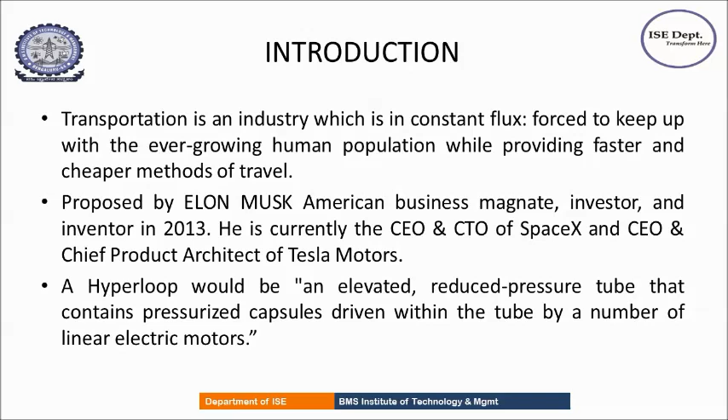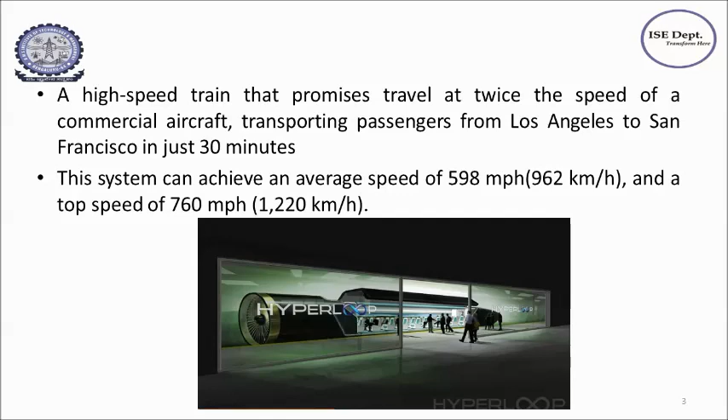Hyperloop propels a pod-like vehicle through a very low pressure or near vacuum tube at more than airline speed. It is both fast and inexpensive for people and goods. These are some of the illustrations of Hyperloop.

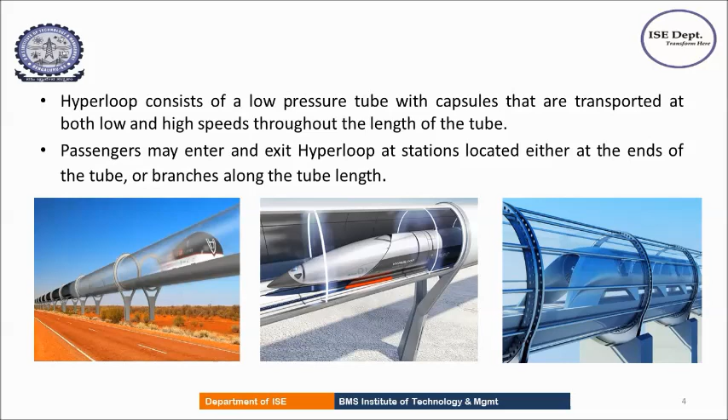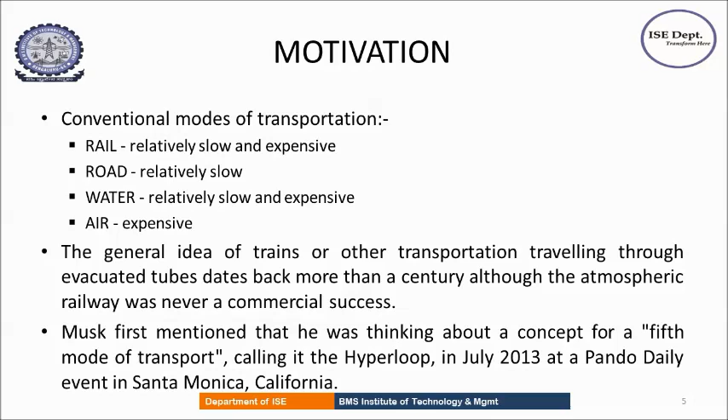So we have our conventional modes of transportation as railways, roadways, airways and waterways. These are either slow or expensive or a combination of both. In order to tackle this, we have the fifth mode of transportation, which is fast, efficient and inexpensive. The main objective of this is quick and safe transportation between cities.

This high-speed transit would have some of the characteristics such as immunity to weather, collision-free, twice the speed of a plane, low power consumption and energy storage for 24-hour operations. The name Hyperloop was chosen because it would go in a loop.

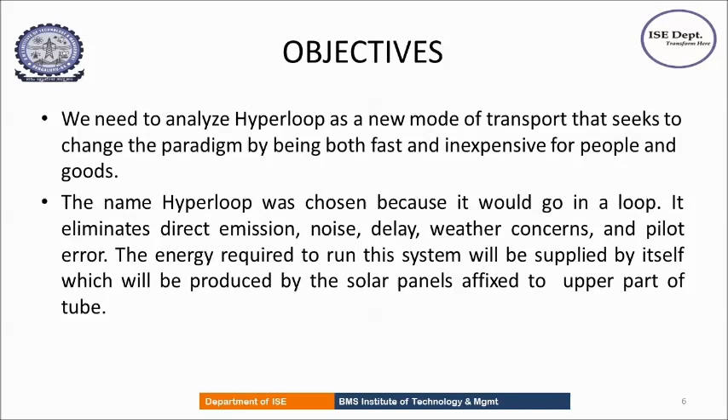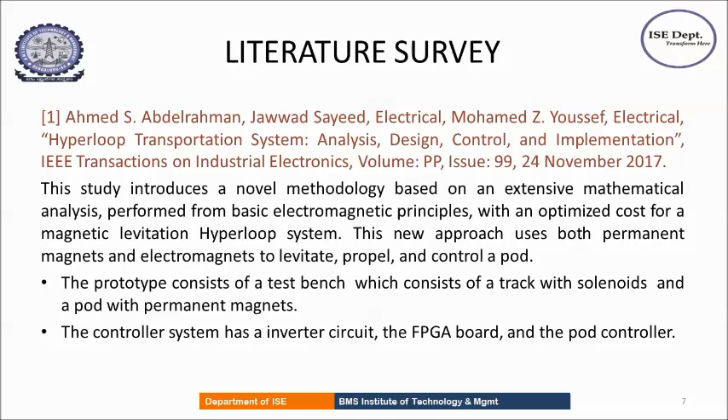Let us see some of the papers which give us some more details about the Hyperloop. So in this, they have developed a prototype of the working of the Hyperloop. The test bench will consist of the track with solenoids and a pod with permanent magnets. They also have a control system which is used to control the whole system. So this is the 3D printed pod and the track implementation. The inverter simulation and solenoid simulation were performed and the coils produced the force that was expected.

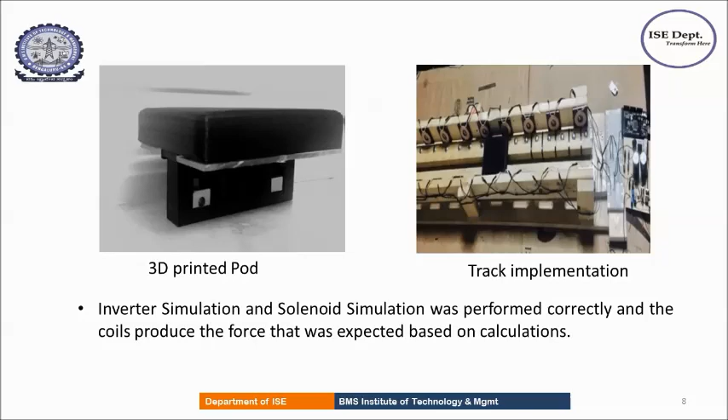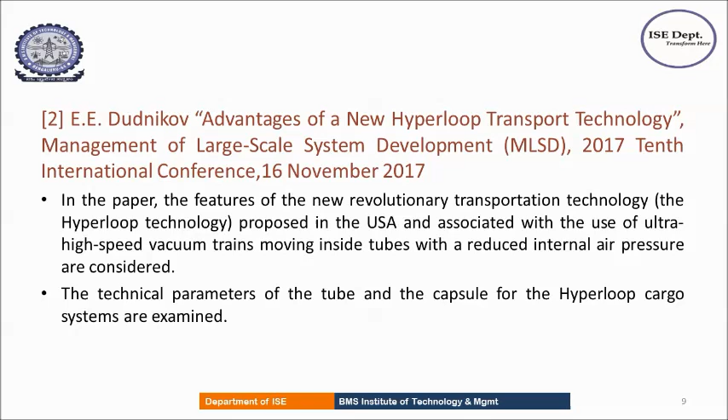In this paper, they mainly focus on the advantages and disadvantages of the Hyperloop transportation system. The technical parameters of the tube and the capsules were also examined. So let's see the design part of the Hyperloop. We need the Hyperloop to be very energy efficient. So technically we have four major components: capsule, tube, propulsion and route.

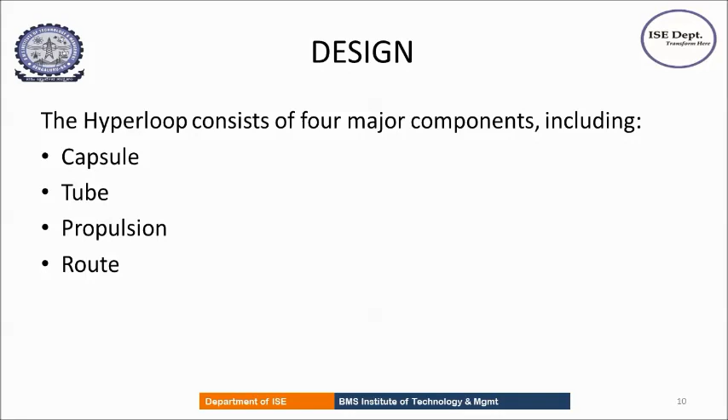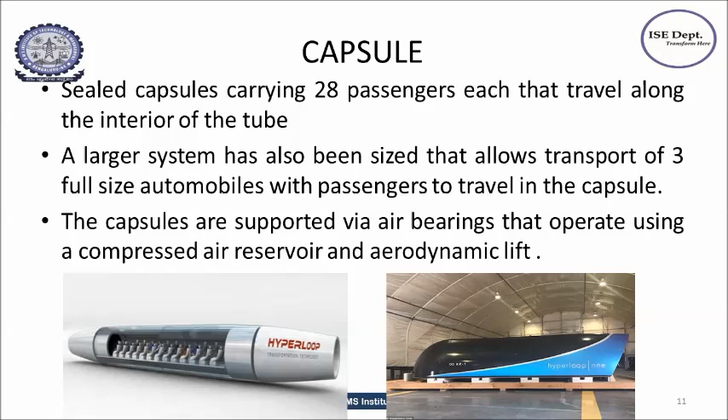We have the capsules that carry passengers traveling at speeds over 700 miles per hour. As we can see, this is the illustration of a capsule. The capsules are supported via air bearings that operate using a compressed air reservoir and aerodynamic lift. The tubes are not completely free of air, but they have very low pressure. The compressor fan inside the capsule will compress the air and redirect the air to the back of the capsule for additional propulsion.

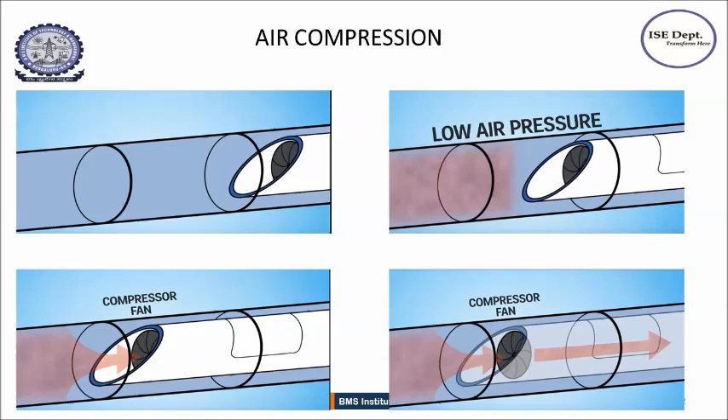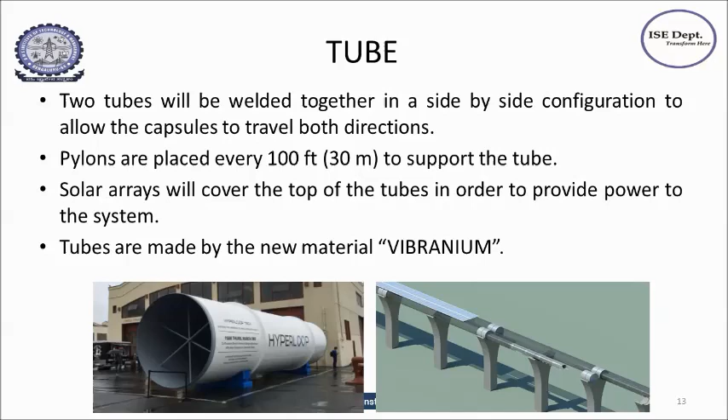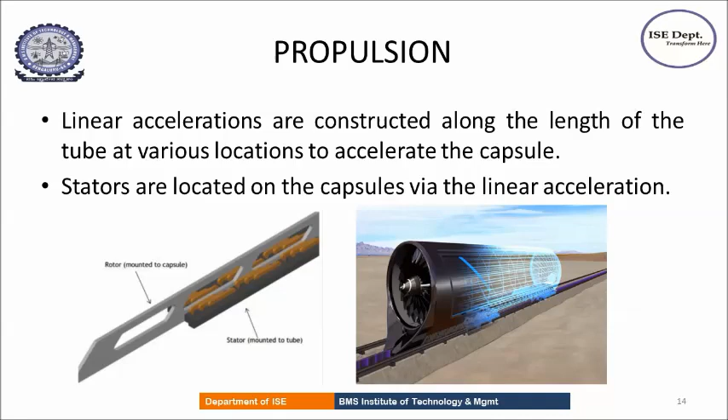The capsules are propelled by the electromagnetic motor. The tubes will have solar panels which are used for generating the required power. The tubes are made of a new material called vibranium. It is both stronger than steel and lighter than aluminium. For the propulsion purpose, we have the stator which is stationary and the rotor which is the moving part. These two help in the linear acceleration of the pods.

The main route has been proposed between Los Angeles and San Francisco, as you can see in the left side diagram, and the right side diagram shows the route between Pune and Mumbai which has been proposed. This reduces the travel time from 180 minutes to 25 minutes.

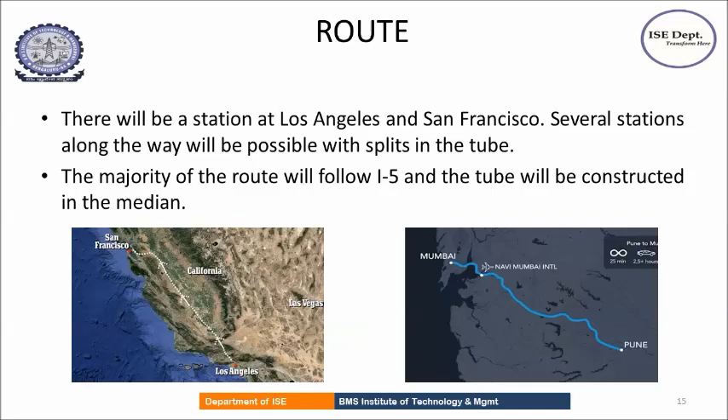Let us see some of the applications of the Hyperloop. High-speed transportation of people and goods is the main application. A Hyperloop requires 30 minutes to cover a distance of 561 kilometers. An aircraft requires 1 hour 15 minutes, a high-speed train 2 hours 38 minutes, and a car needs 5 hours 30 minutes. It is faster than any other available transportation method.

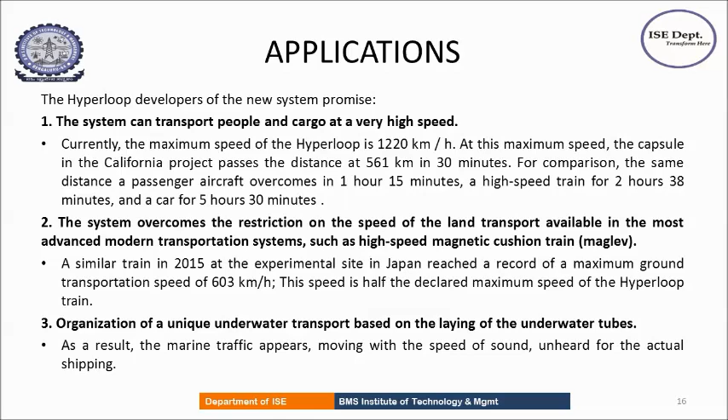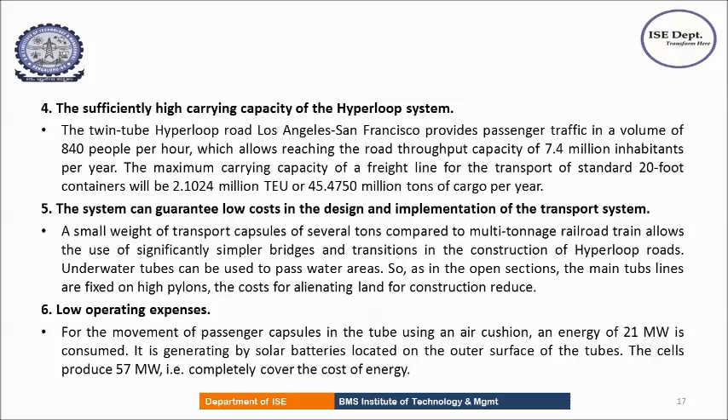An experimental site in Japan reached a record maximum ground speed of 603 km per hour. This speed is half the declared maximum speed of the Hyperloop train. It can even be used underwater. It has high carrying capacity. It guarantees low cost in design and implementation. It has low operation cost expenses also. It is immune to earthquakes, erosion, and other weather conditions, and is also very ecologically friendly.